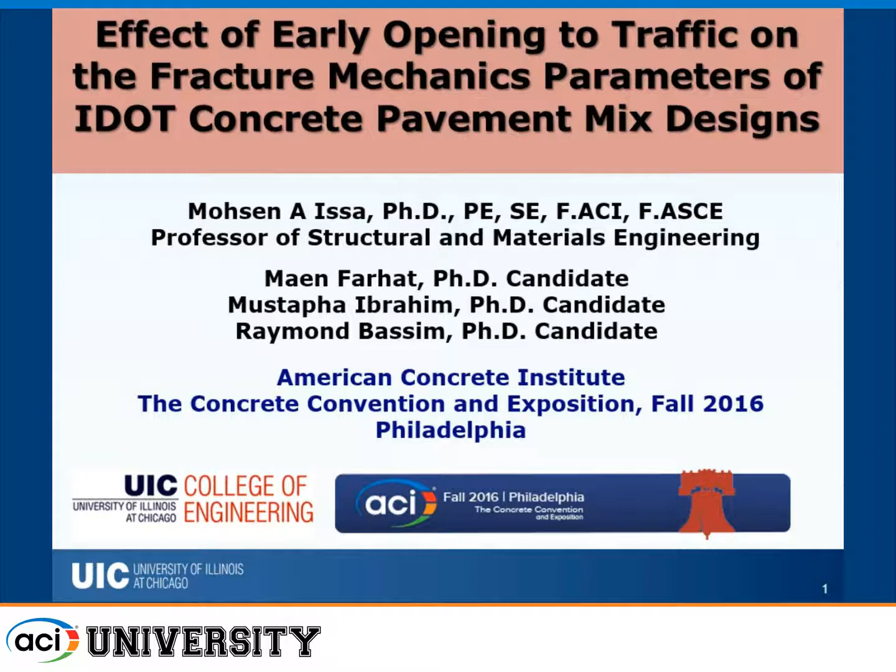So I'll be talking about the effect of early opening to traffic on the fracture mechanics parameters of the IDOT concrete pavement mix designs. As a quick introduction, there are plenty of challenges associated with Portland cement pavements, especially at the stage of early opening to traffic.

These challenges can range between traffic congestion due to closures, economy due to time delays and time wasted due to construction and the time we need to wait to open a pavement for traffic, and fatigue damage, since we still have a problem identifying and quantifying fatigue damage at early opening to traffic, especially when the criteria for opening to traffic at IDOT is mostly based on hardened properties, mainly the compressive strength of the concrete.

Most of the design parameters taken into consideration in the design of pavements are mainly also hardened properties. However, we still do not take into consideration the effect of stiffness degradation at very early opening to traffic, at a very early age.

And when we say very early age, we're talking about 12 hours, 1 day, 2 days, and 3 days. The current specification is mainly focused on strength, as I mentioned.

For example, for PV pavement mix designs, which I'm going to go over in a little bit, the criteria for opening to traffic is compressive strength exceeding 3,500 psi. It will also be covered, in part, in the next presentation, showing that we can add to these parameters another one, such as the effect of stiffness degradation due to early loading at early age of the concrete pavement.

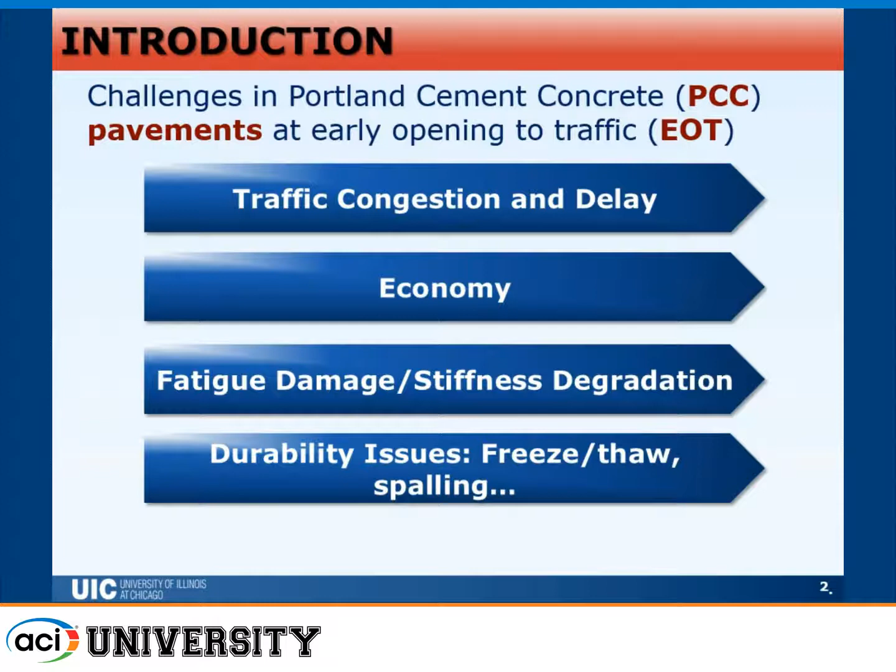The objective of this study is to characterize the fracture parameters describing the crack initiation mechanism and the stiffness degradation in concrete pavements at early age: the critical stress intensity factor, and the critical crack mouth opening displacement.

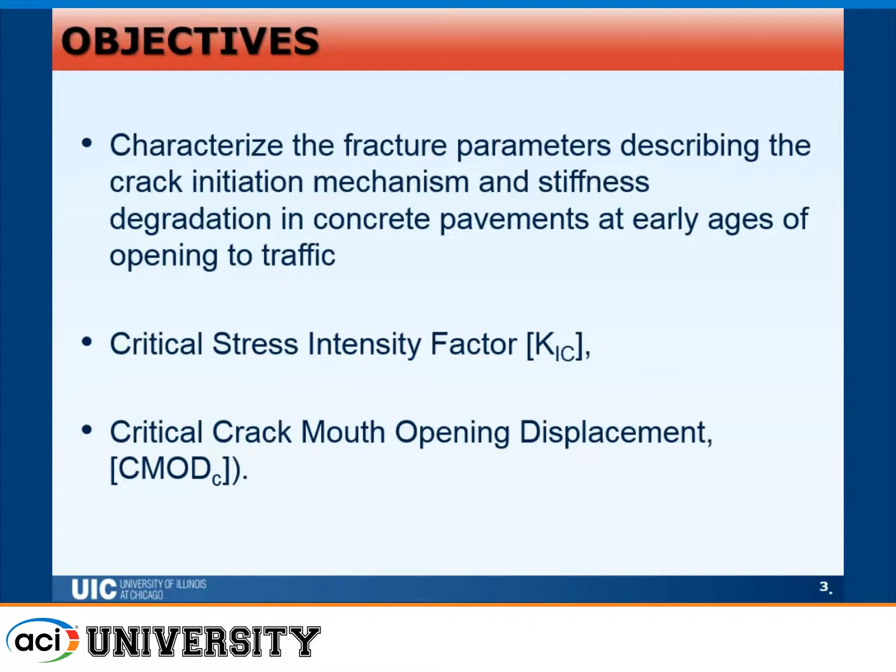Obviously those two are the main fracture mechanics parameters, and they are used to identify the crack initiation and the stiffness degradation, especially the compliance factor associated with the loading and crack propagation at the vicinity of a crack tip in the concrete pavement.

The parameters considered in this study are, in fact, a portion of a bigger study. The bigger study took into consideration the age of the concrete mixes, different mix designs, and different amounts and types of fibers.

Age of the concrete mixes can range between 9 hours, 12 hours, 13 hours, 1 day, up to 28 days, as you can see here.

The types of fibers we used are two different types: the WR Grace Strux 90/40, which is very popular, and the Master Fiber, noted as F2 and F1, as shown here, which I'm going to go over in the other slides, along with the amount of fibers used.

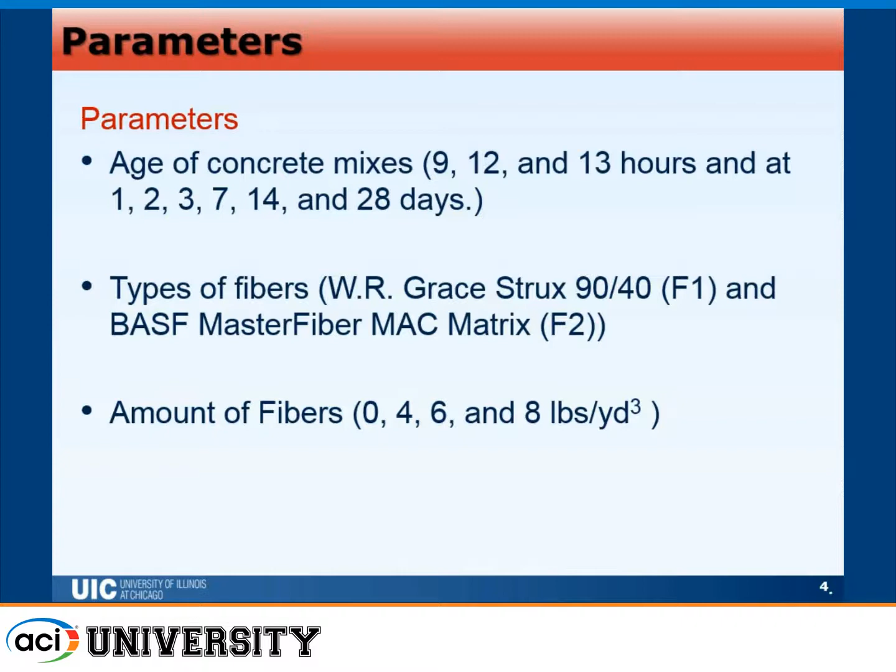Other parameters were taken into different studies, such as the strength, the maturity effect, and different types of combinations were taken. In this slide, I'm going to only cover the parameters taken for the fracture mechanics study.

The PV mixes and the fresh properties of the mixes conducted: we conducted 3 different types of mixes: the PV mixes, the pavement mixes for IDOT, and the patches mixes, which are PP1 and PP2.

The PV mixes were divided into PV without fibers and with fibers. So when we say PV, it's without fibers. The water to cement ratio is 0.42.

PV F1 stands for Strux 90/40, and it varied between 4 pounds, 6 pounds, and 8 pounds. The Master fibers are noted as PVF2. In case of PV, we only considered the 4 pounds, as an additional investigation we wanted to look into.

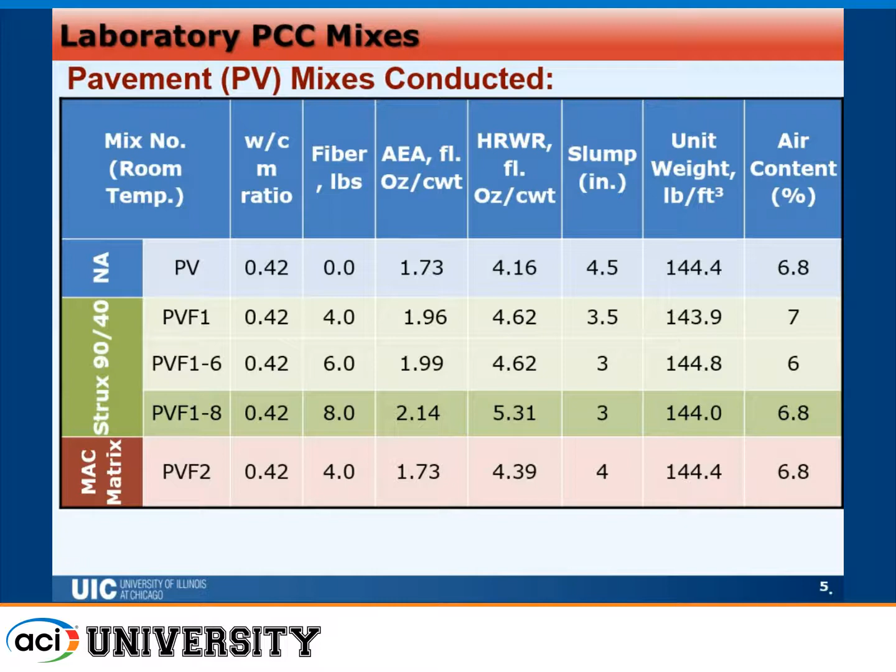For the patches mixes, PP1 and PP2, we also took into consideration the effect of Strux 90/40 fibers at 4 pounds per cubic yard, and PP2F1 Strux 90/40 also at 4 pounds.

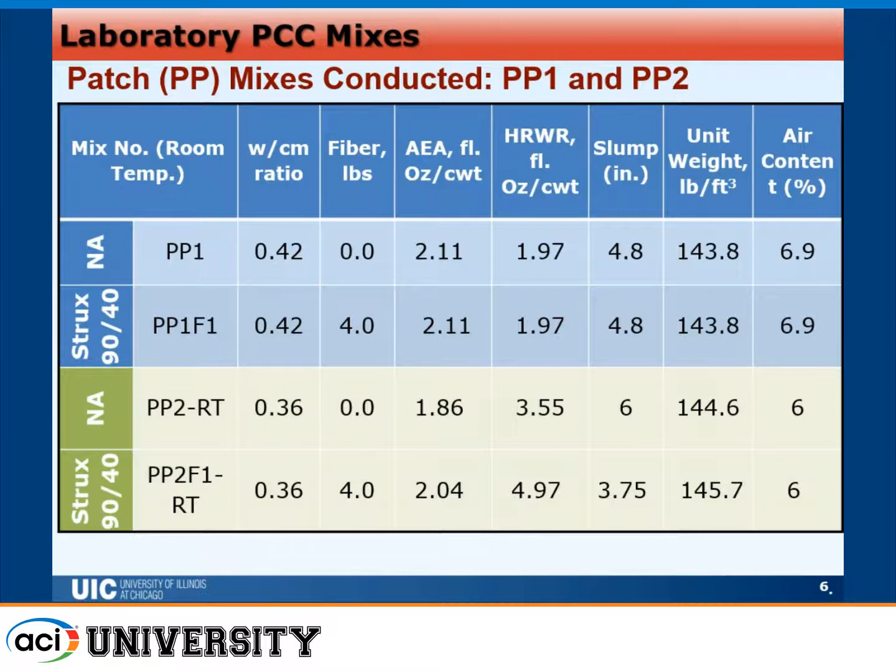You can notice here that the water to cement ratio in the PP2 case is smaller, as a higher strength is expected or required at the time of opening to traffic. The curing test methods in this study considered room temperature under 100% humidity.

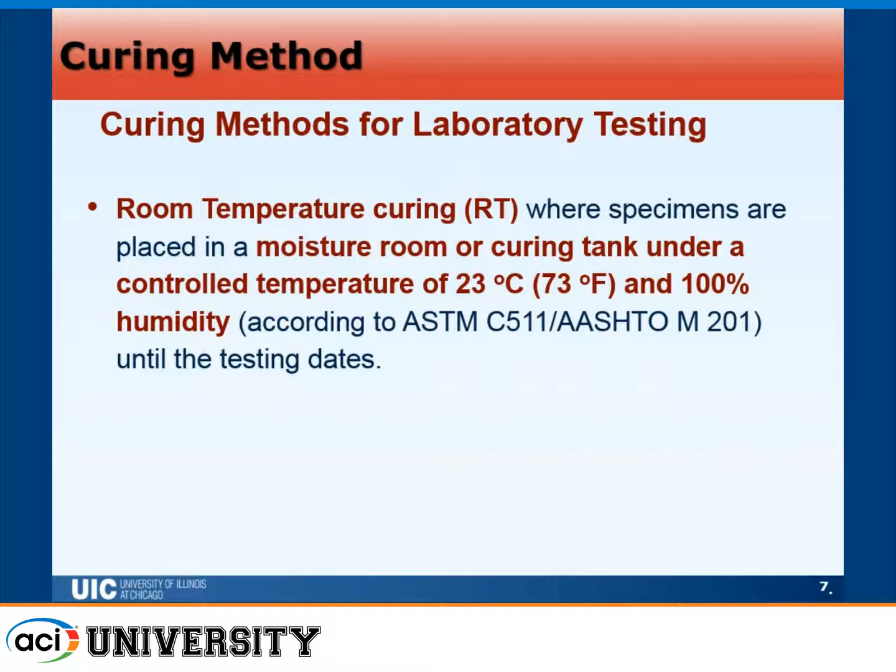In different studies, we also took into consideration, as you'll see in the next presentation, a study divided between normal room temperature and cold temperature to simulate opening to traffic at early age in different weather conditions, and its effect on different parameters such as maturity and other variables.

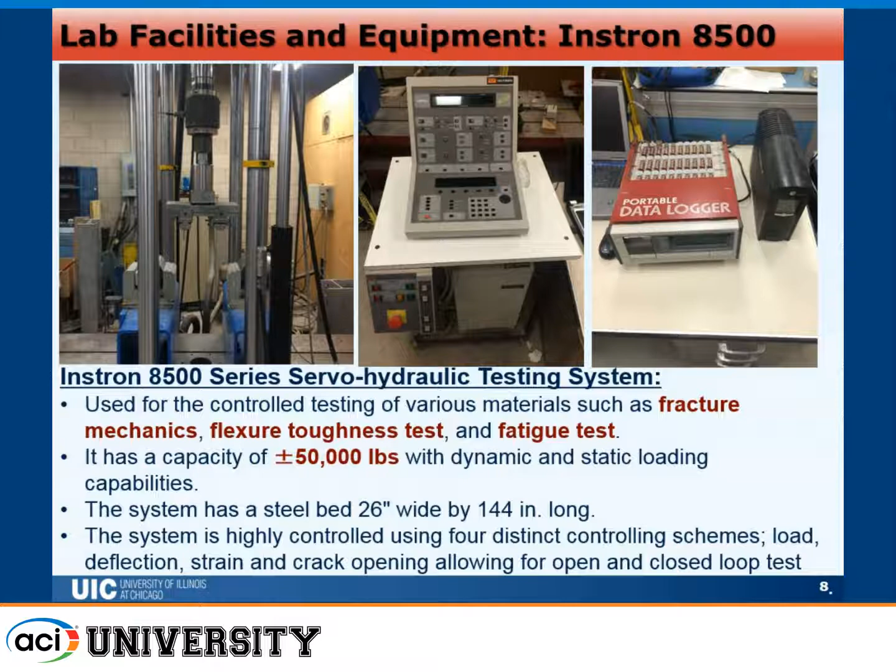The testing machines used were a simple Instron machine, a servo closed-loop machine with 50,000 pounds capacity of the load cell. The data was collected on a separate data logger. For the strength results, we used a normal Tinius-Olsen machine with 400,000 pounds capacity to measure the compressive strength.

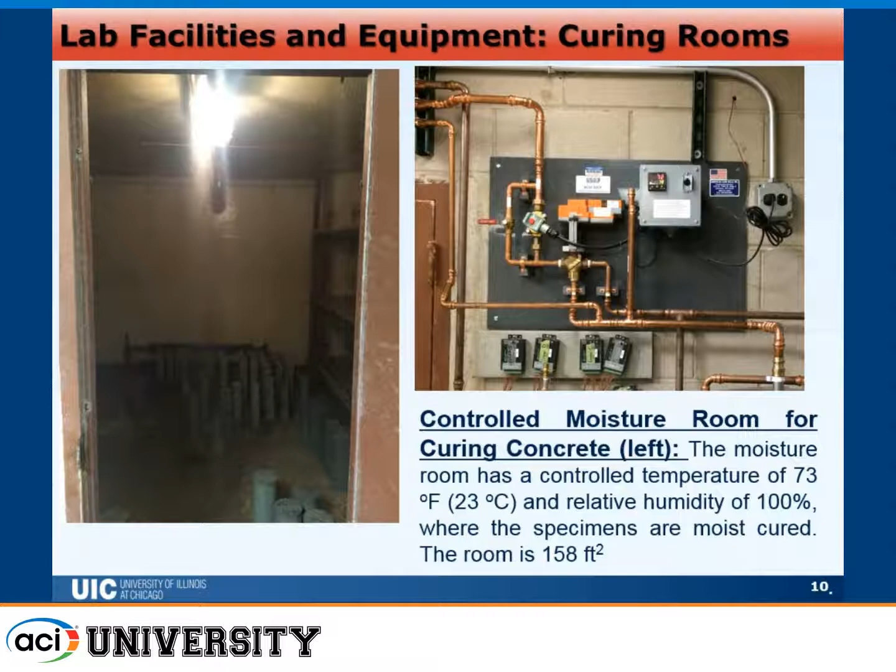and the flexural strength. This is the moisture room that we used. A special system was applied to maintain 73 degrees room temperature and a humidity of 100%. Similar here, that was a backup, an additional way of curing, also a heating tank with full immersion in water.

The significance of the fracture mechanics is to provide an indication of the effect of early opening to traffic and age on the toughness and stiffness degradation and crack growth in PCC pavement. We also need to study the pre-cracking, cracking, and post-cracking behavior due to the tension softening curves after performing

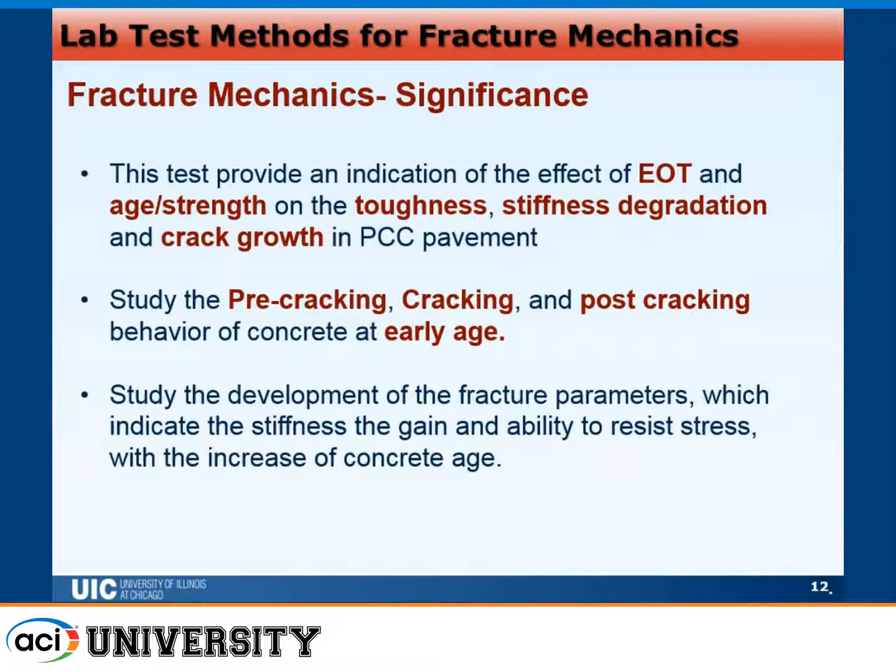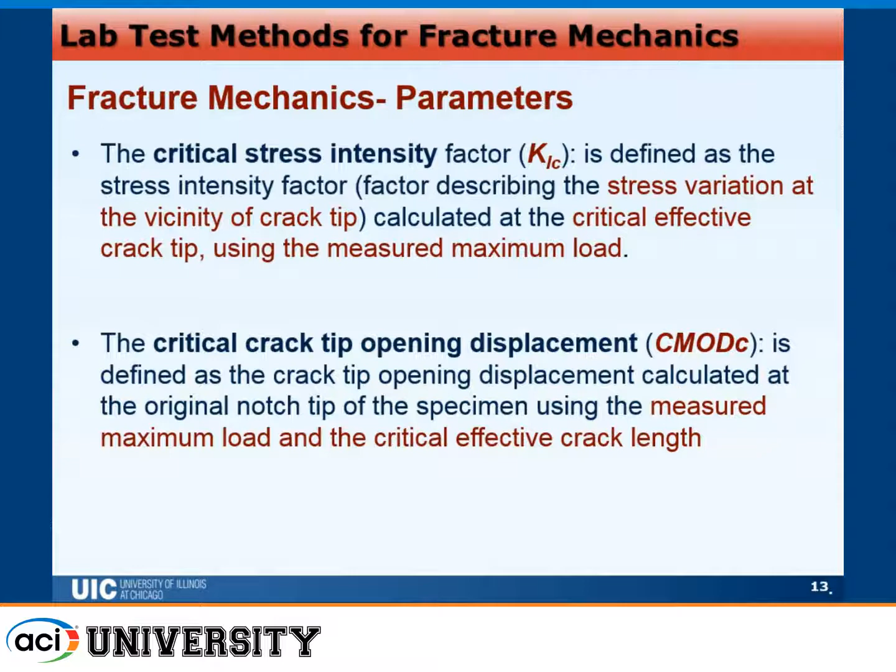the load CMOD curves. The parameters to be investigated are the stress intensity factor, which is an indication of the stress variation at the vicinity of the crack tip, and the critical crack mouth opening displacement, the CMOD, defined as the crack tip opening displacement at the original notch tip.

The procedure for testing: we prepared 3 by 4 by 16 beams, notched as per the RILEM recommendations at depth of the specimen divided by 3, equivalent to 1.33.

A load cell of 1.8 kips with high sensitivity was used because these samples are notched and do not take higher loads to initiate the crack. So we decided not to use a 50,000 pounds load cell because it has lower sensitivity; a higher sensitivity load cell was used.

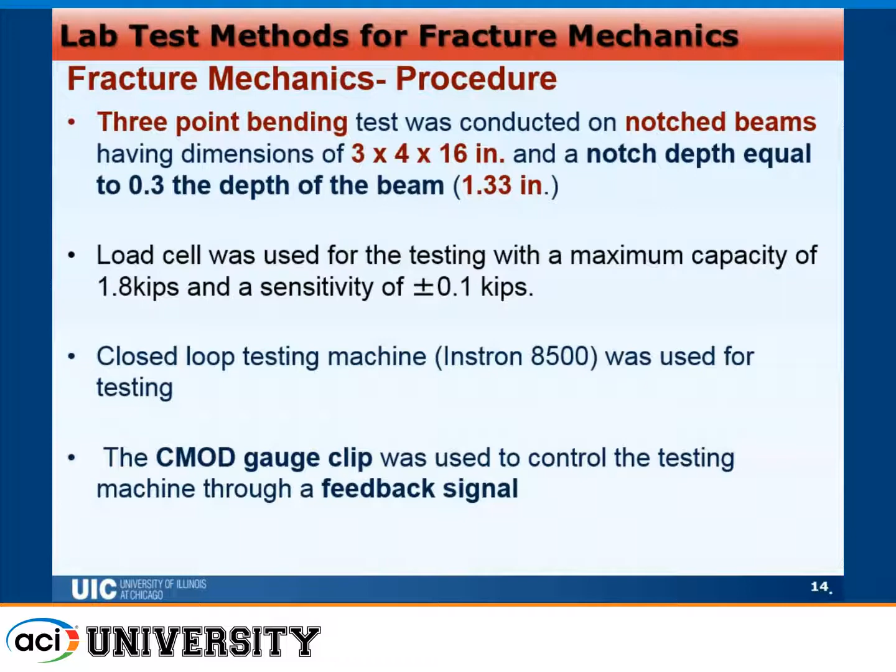The CMOD gauge clip was used to control the feedback signals. A CMOD gauge was used to control the machine. I'm going to show it in a picture in a little bit.

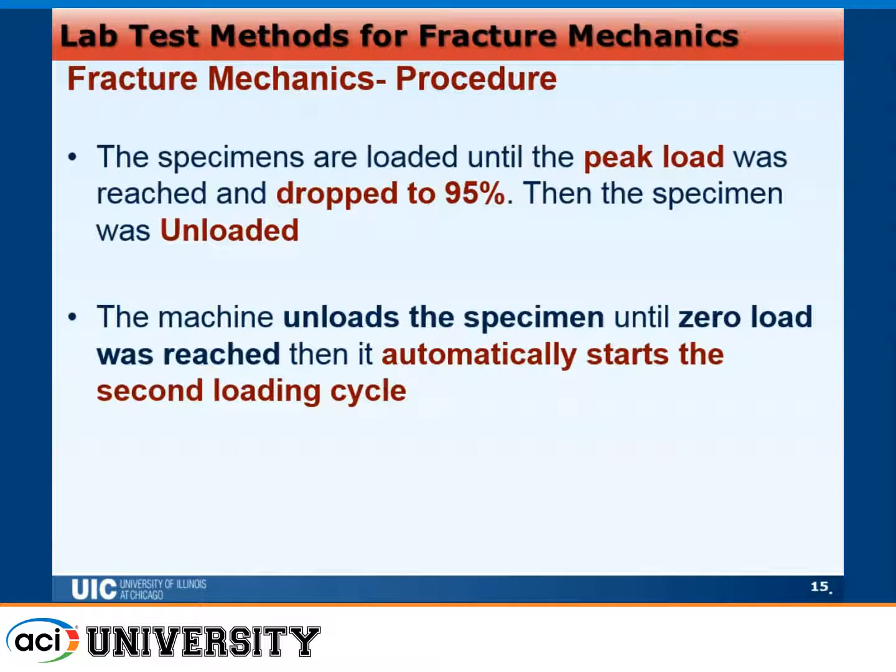The rate was 0.0005, which is very slow CMOD loading, not displacement loading, for the first cycle, designed to be around 5 minutes per cycle. Then for the rest of the cycles, after the crack initiated, we did not have to go as slow, so we doubled it.

A total of 10 cycles of loading and unloading. We kept doing it, and after that the specimen was taken to failure. The reason we need to do that is to control the crack propagation as we go in the testing, to be able to calculate all those fracture mechanics parameters.

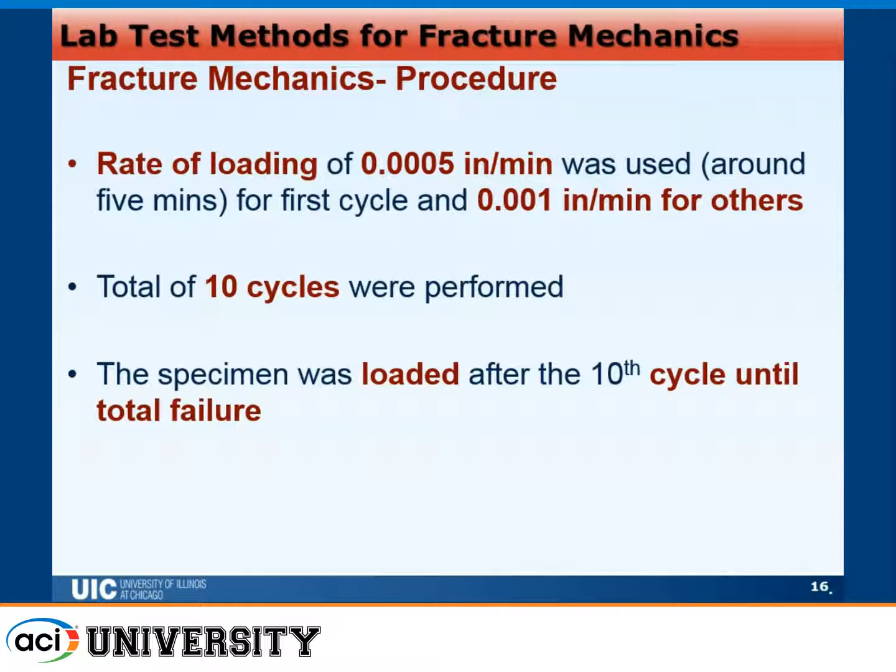At the point where the CMOD goes out of range, the LVDT will pick up and we'll continue, giving us extended data after the range of the CMOD, which is around 10 millimeters. So after more than 10 millimeters, the ones with fibers, as you will see later, will go up to 25 millimeters of crack mouth opening displacement. However, the ones without fibers will split into 2 pieces at around 1 millimeter.

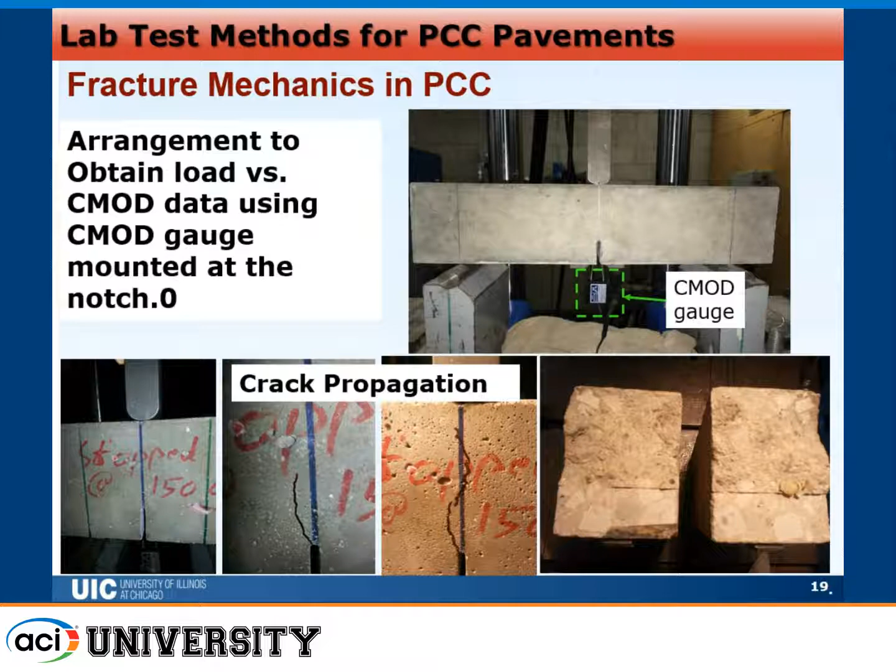So this CMOD gauge controls the loading of the machine, and it's 3-point loading here, with another representation here for the shape of the failed surface. This is the setup that I was talking about, taken from Shah 1990.

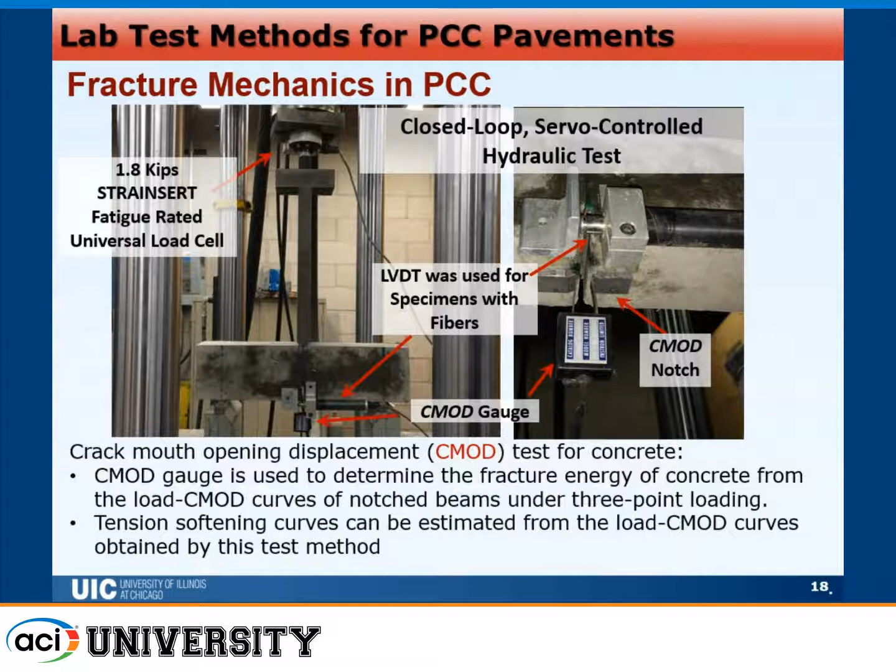Load P with supported span S, and the thickness of the loading clips was taken into account. These loading clips, if you see them, were glued using epoxy, and the CMOD clip gauge was attached in the middle so that when you apply the load, it will open at the bottom, and the CMOD gauge will pick up how much opening there is. All these parameters were taken into consideration, and the initial crack tip notch length, A0, was also taken into account.

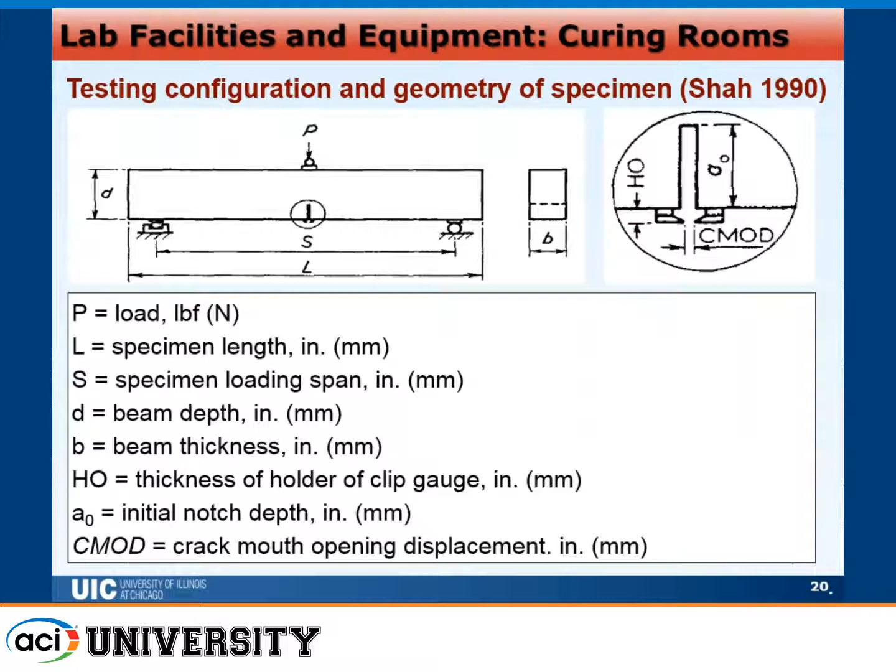This is a typical loading and unloading scenario for every sample. If you consider all the cases, we have with fibers and without fibers at 9, 12, 13 hours, 1 day, 2 days, 3 days, 7 days, 14, and 28 days, with and without fibers for all the mix designs.

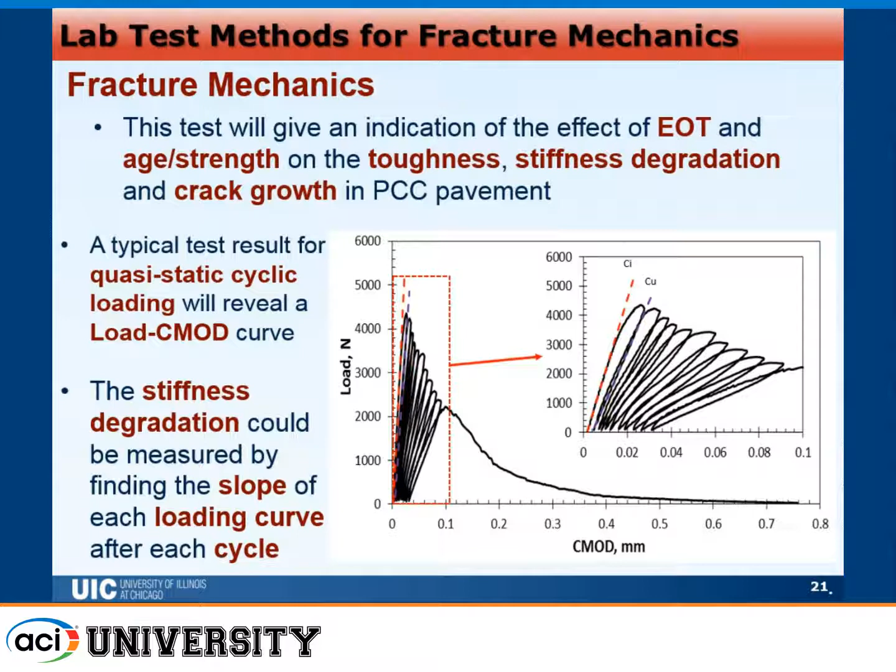With fibers it normally takes much longer time, because without fibers it will split in half at around 1 millimeter, which is 0.04 inches, but the ones with fibers take up to 1 hour of loading, sometimes 1 hour and a half, because the rate of loading is too slow.

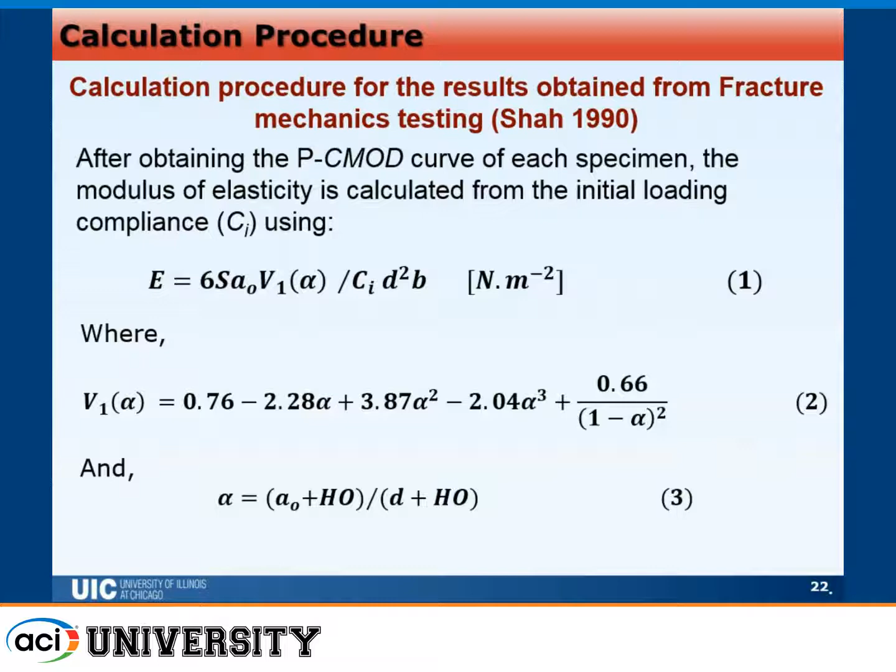So these are the equations from the literature used to calculate the parameters. The purpose is to equate the compliance factor with the unloading compliance and the loading compliance obtained from the CMOD, as you see here.

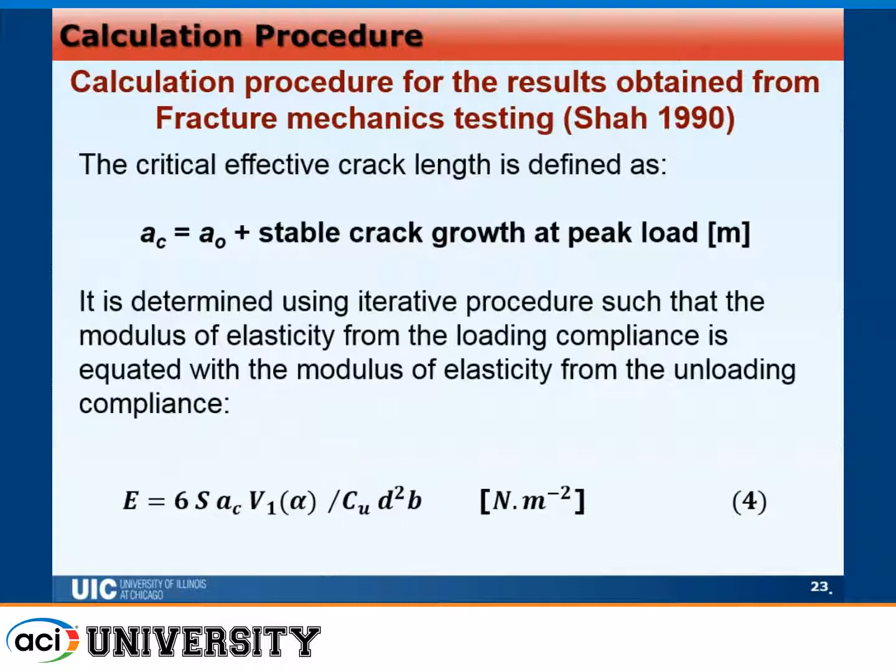Once you equate them, you will have a critical stable crack growth. You will equate the E, the modulus of elasticity of the unloading, and the modulus of elasticity of the loading, and then you will be able to calculate the critical crack mouth opening displacement and the stress intensity factor.

Typical values for the PV without fibers, as you can see, they fail and stop at around 1 millimeter here, which is 0.04.

Another observation is, as we increase the age from 9 hours up to 28 days, the maximum peak load will increase. But at some point, after we pass 3 days, the gain in peak load strength is less significant than the initial gain from 9 hours to 3 days.

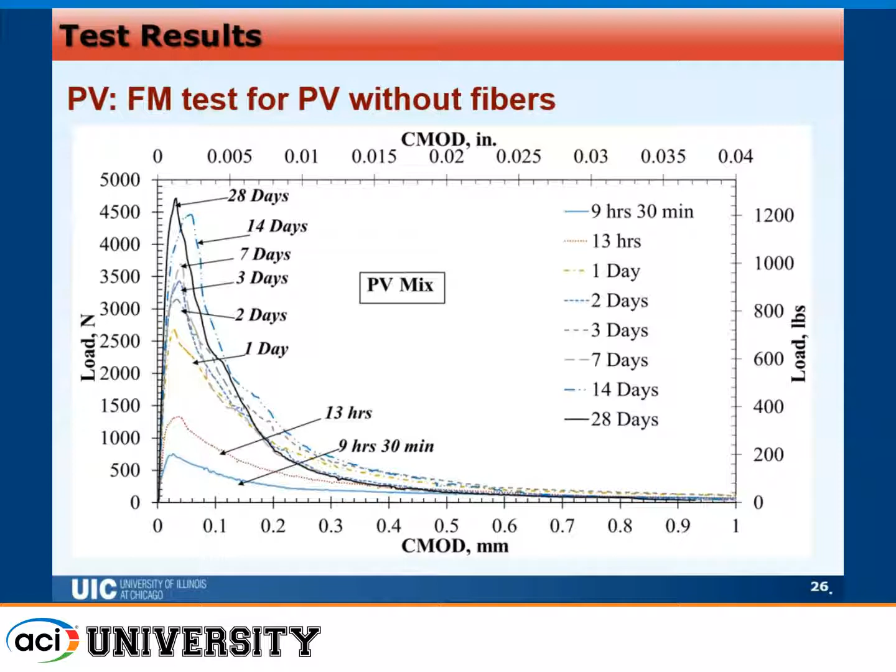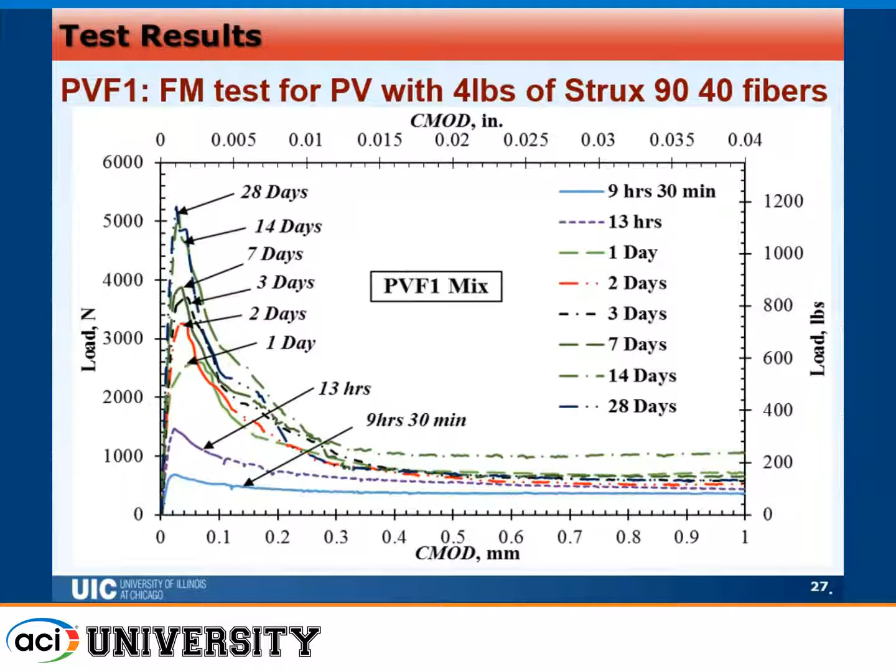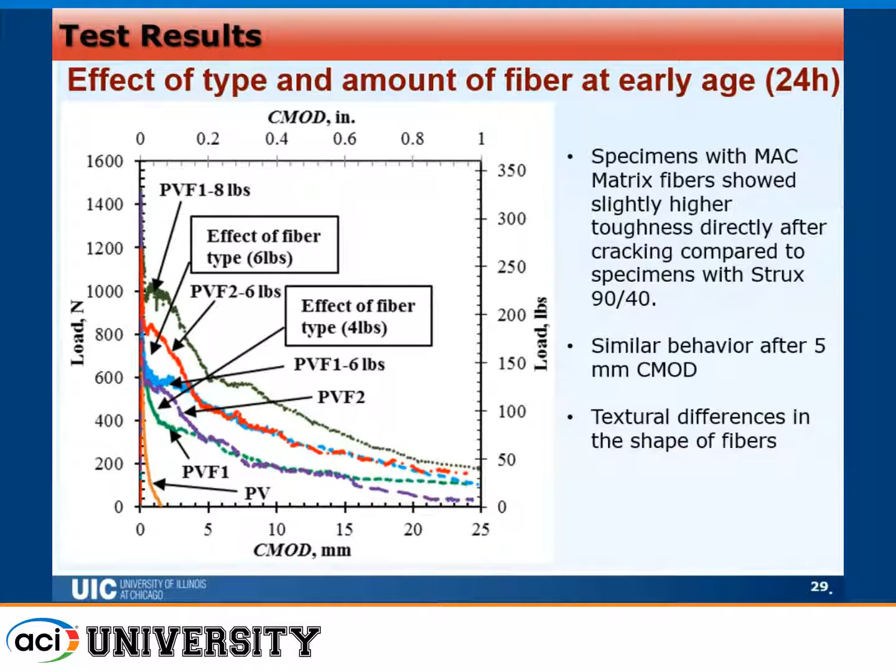Similar observation here at later age. This one was at 24 hours, as you can see. Almost the same observation at 28 days. Always the 8 pounds was outperforming all of them.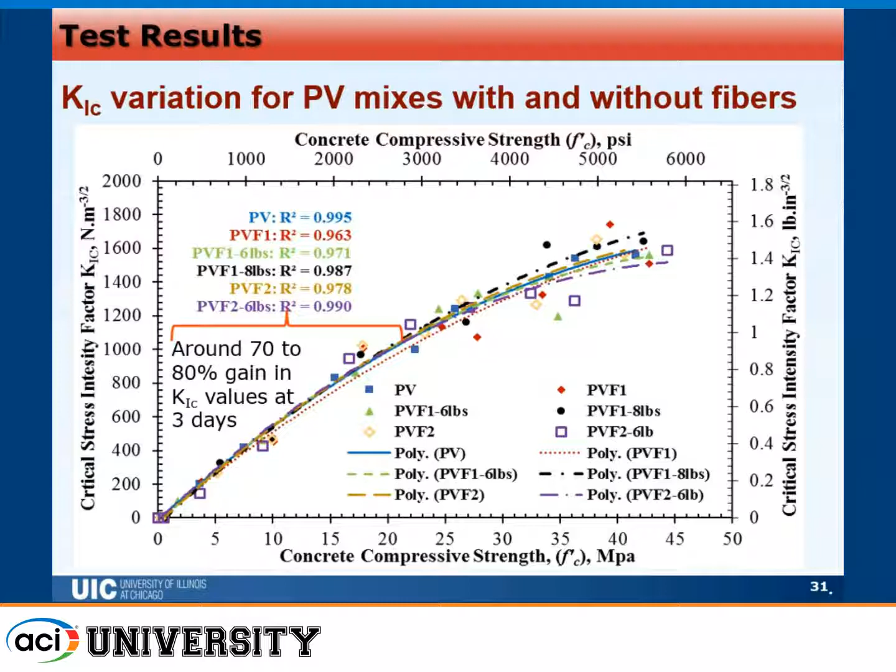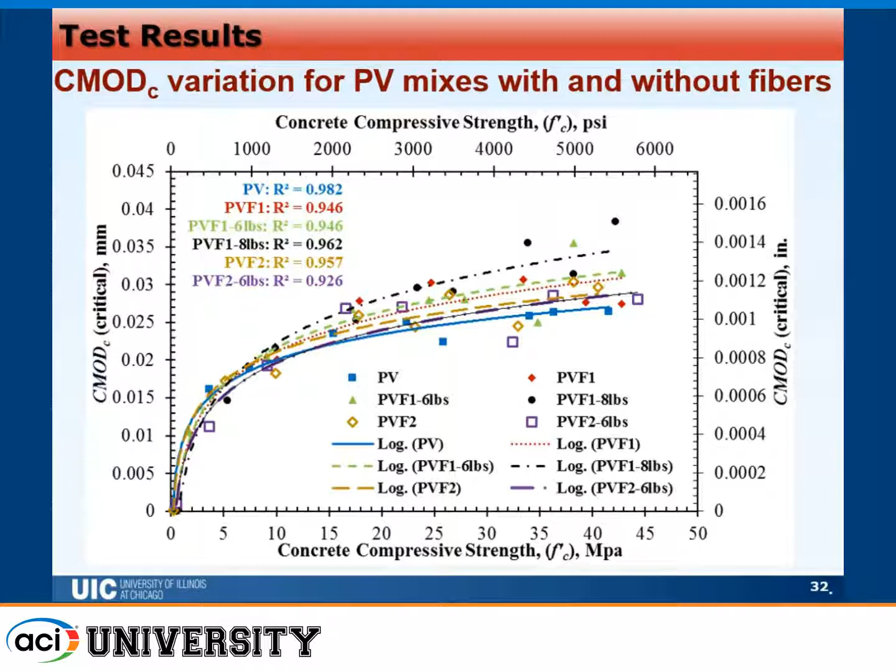The values for the stress intensity factor, and also the variation of the stress intensity factor, were very consistent for all the PV mixes, with a very high gain at around 3 days. Similarly for the CMOD values at around 3 days, around 70% or even more, up to 75%, was obtained in the first 3 days. For the PP1 and PP2 mixes, almost the same observation.

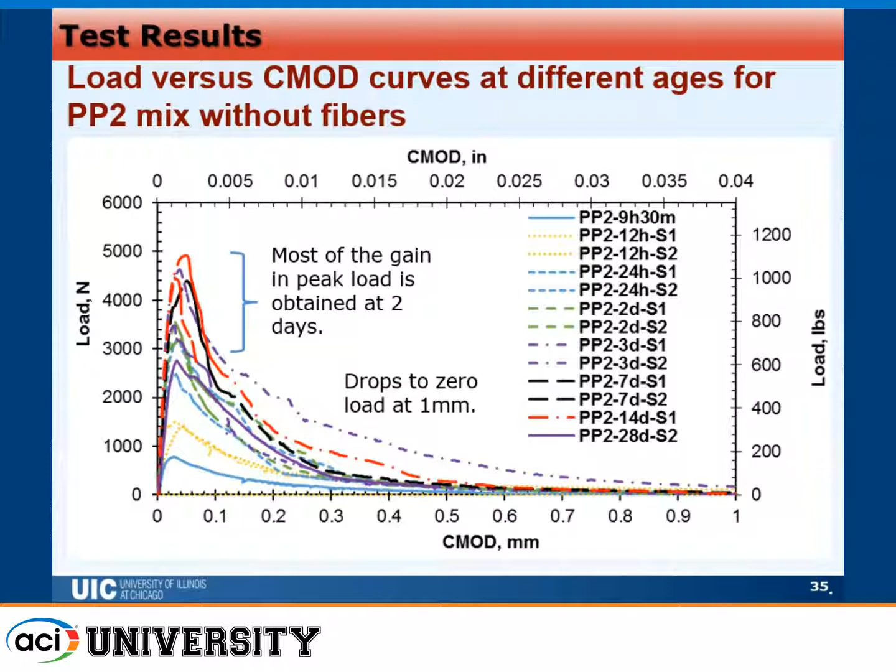As you can see here, also very consistent behavior for PP1-F1 and PP1, which is patch 1 with and without fibers, and similarly with patch 2 with and without fibers.

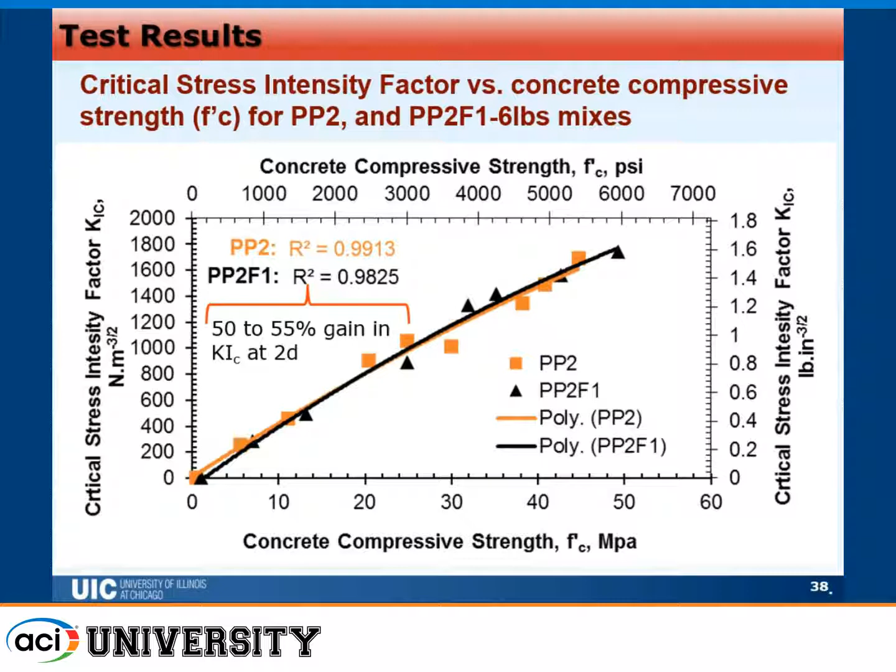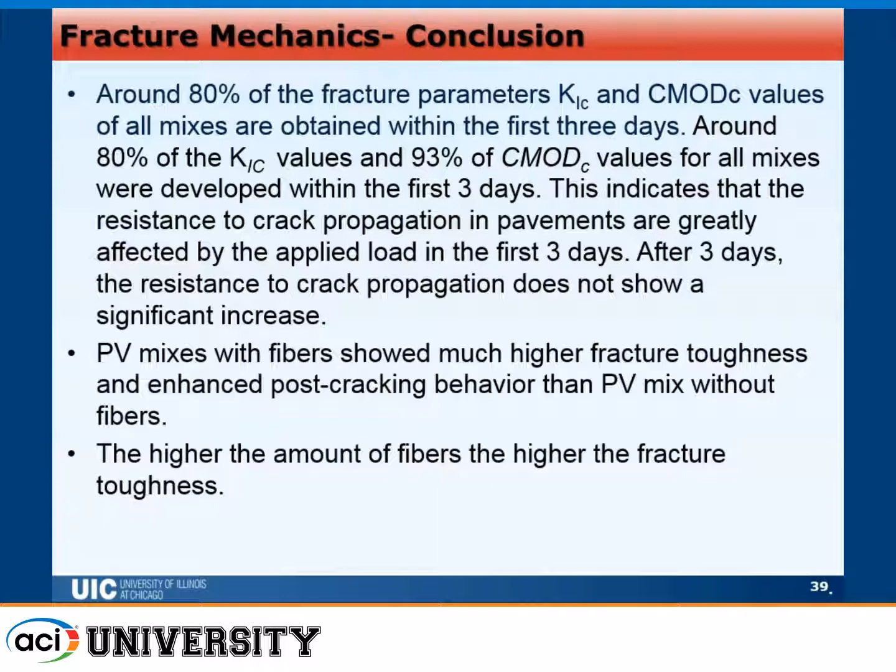As a general conclusion, because I'm running out of time, most of the results were obtained before or at 3 days of concrete age, especially for the critical crack mouth opening displacement and the stress intensity factor.

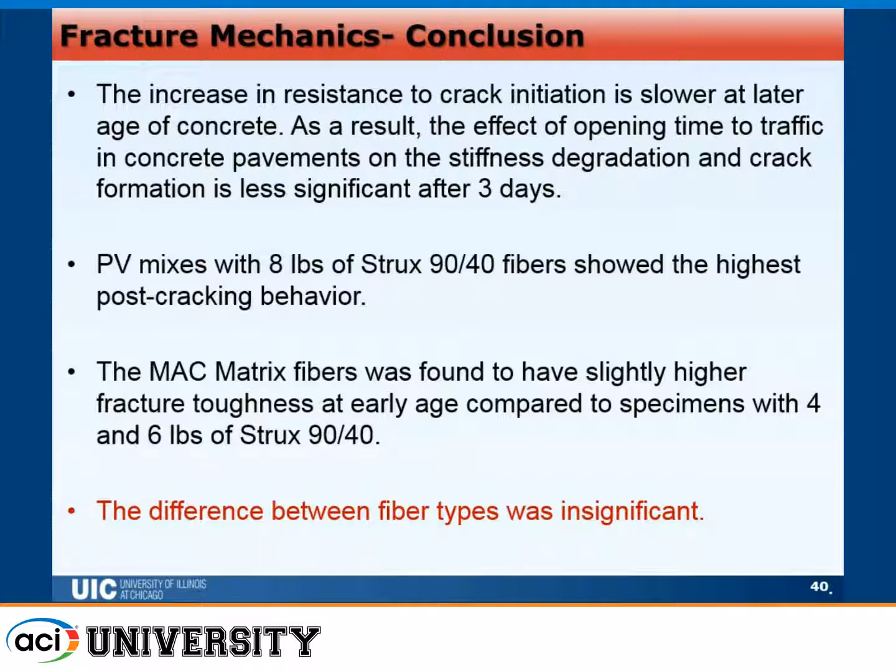The difference in fibers was not really significant between the type of fiber. However, the amount of fibers played a big role, and there was a big difference between without fibers and with fibers, and a big difference between 4 pounds and 8 pounds of fibers. The 8 pounds outperformed almost all expectations.